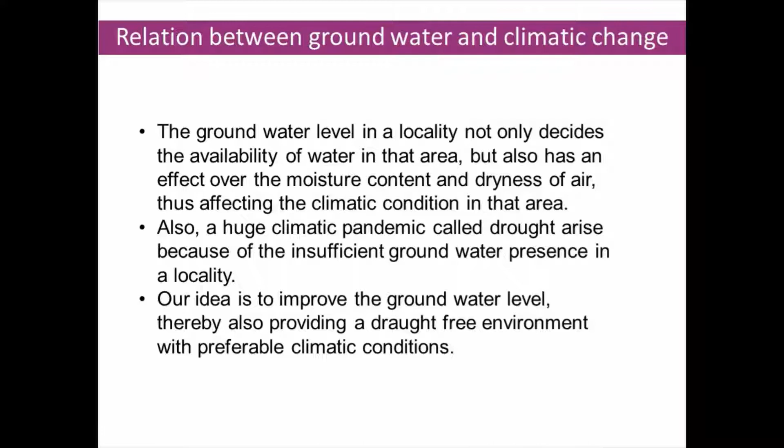This idea is to increase the groundwater level by condensing the atmospheric air to its dew point temperature and letting it seep into the ground through a pipe having a uniform arrangement of pores. Also, the power input to the compressor that is going to be operated in the water condensing cycle, that is the cycle through which air is going to be condensed to water,

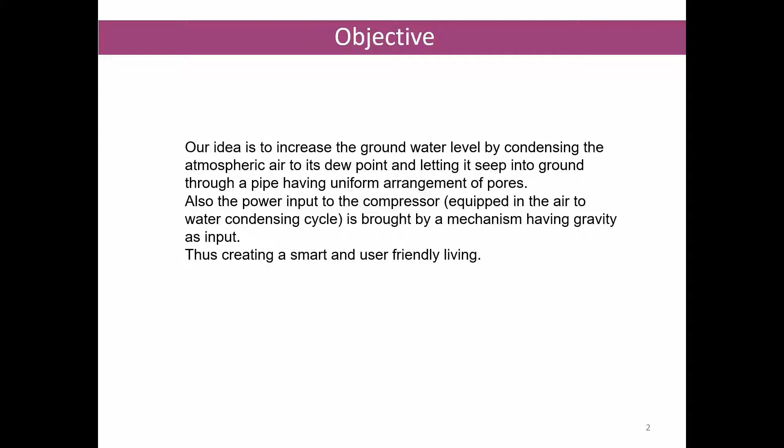could be given by a gravity mechanism. This could reduce the maintenance cost of the overall equipment, thus creating a smart and user-friendly living.

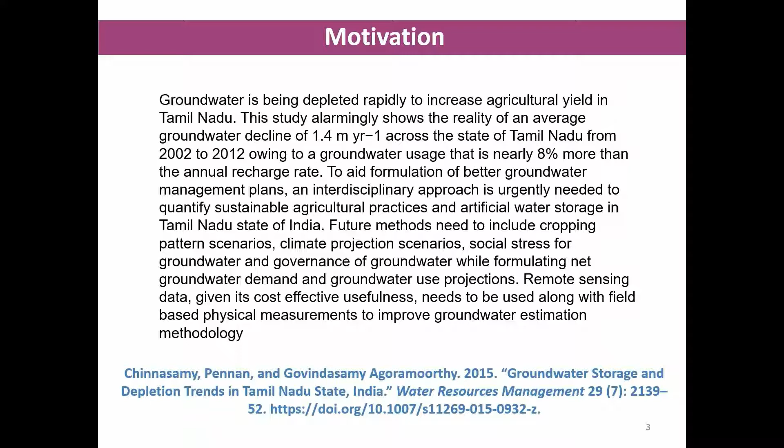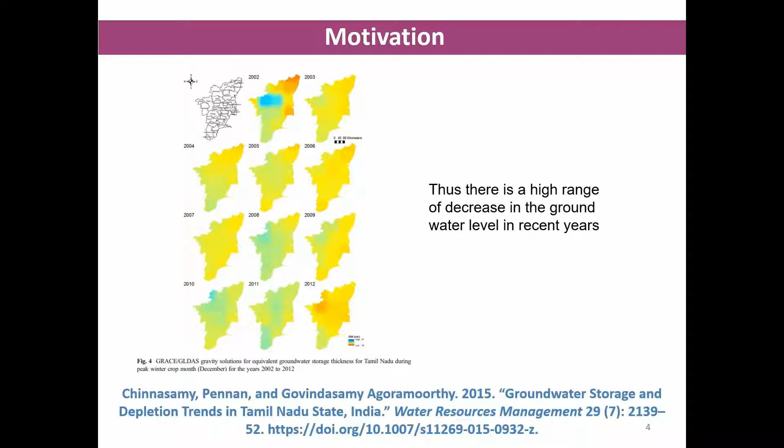Our main motivation for doing this came from a research paper entitled Groundwater Storage and Depletion Trends in Tamil Nadu State, India, which studied groundwater depletion from 2002 to 2012. The researchers Chinnasamy Pennan and Govindasamy saw a tremendous decrease in the groundwater level from 2002 to 2012, and this further increased in the next 8 years, that is till 2020.

So our main problem is that there is a high demand for water on one side, but on the other side a high amount of water is getting depleted, especially groundwater. Also, there are many difficulties in accessing groundwater, as many costly equipments are needed to access it.

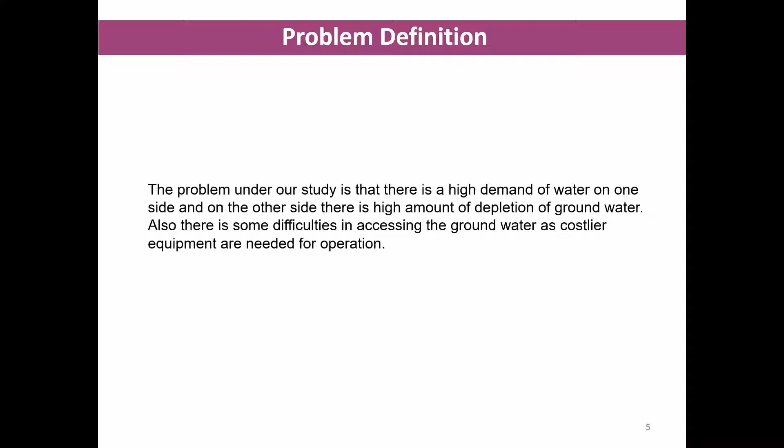The solution that we are proposing comprises 4 different mechanisms. The first one is the gravity mechanism, with which we are going to produce the power that has to be supplied. The second mechanism is the condensing mechanism. Through this mechanism, we are going to condense the atmospheric air to water.

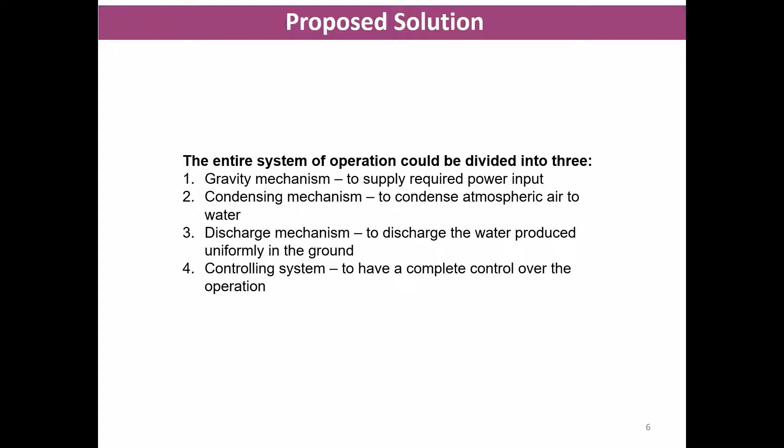Discharge mechanism. The discharge mechanism is the mechanism through which the condensed water is going to be uniformly distributed underground. Next is the controlling system. This part makes the entire project a smart one, giving us complete control over the operation.

Let us move on to the first mechanism, the gravity mechanism. This entire cuboid is going to be the gravity mechanism, which takes in gravity as the input and supplies us with the required power. This gravity mechanism needs several components, which are discussed as follows.

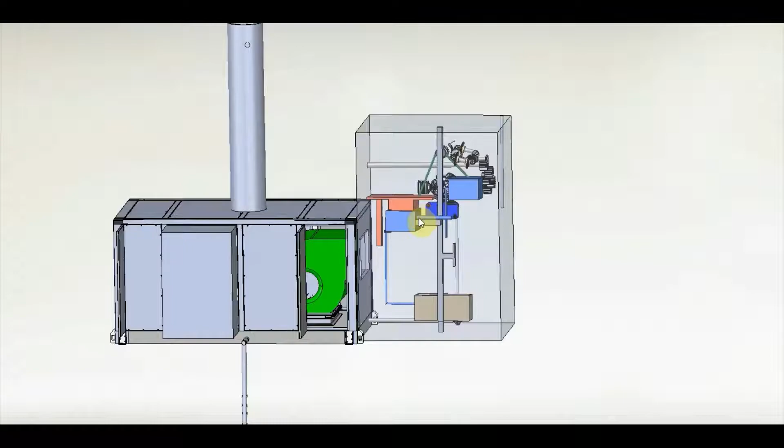The gravity mechanism consists of the following components: a central fixing member, a fixed chamber, a counterload chamber, a storage chamber, a load and a pulley. To the pulley, the load and the counterload chamber are attached on both sides. At first,

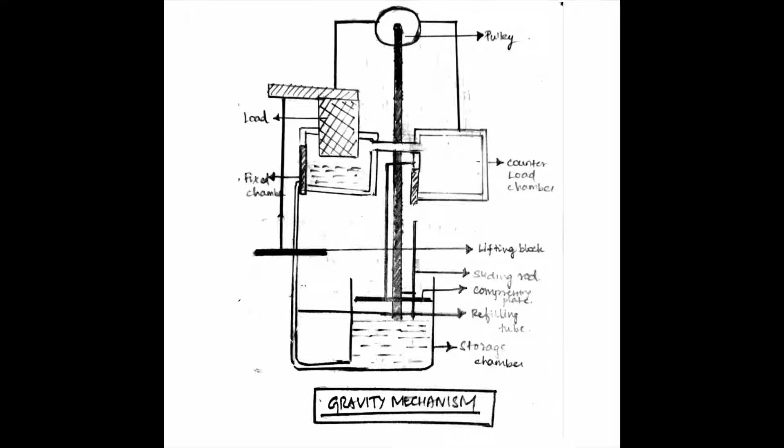the load, due to its weight and the pull of gravity, comes down and goes into the fixed chamber. As it gets deep into the fixed chamber, the liquid in the fixed chamber is transferred to the counterload chamber through a pipe which connects the fixed chamber and the counterload chamber.

Now, as the counterload chamber gets heavy because of the fluid being filled into it, it comes down and the load goes up. As the counterload chamber comes down, a rod pushes open a side of the counterload chamber, which makes the water stored in the counterload chamber drop down to a storage chamber.

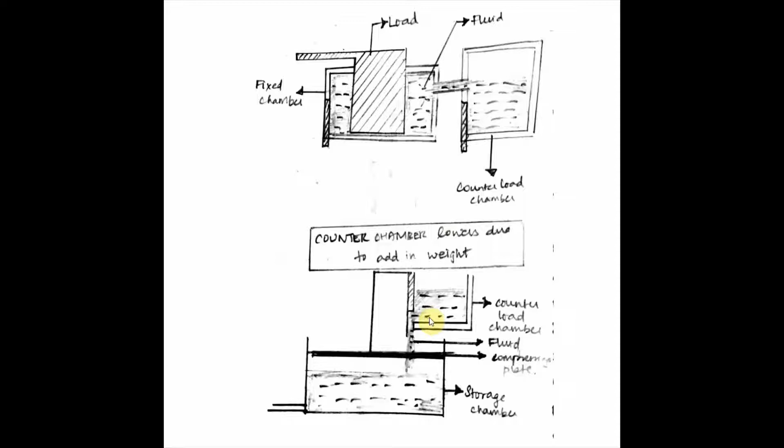This in turn will cause the load on the other side to come up, and this storage chamber stores water which gets pressurized to the fixed chamber by a compressing rod operated as the counterload chamber comes down. To say it in sequence, the counterload chamber comes down, also pushing the water in the storage chamber. Thus, the water gets pressurized and goes to the fixed chamber.

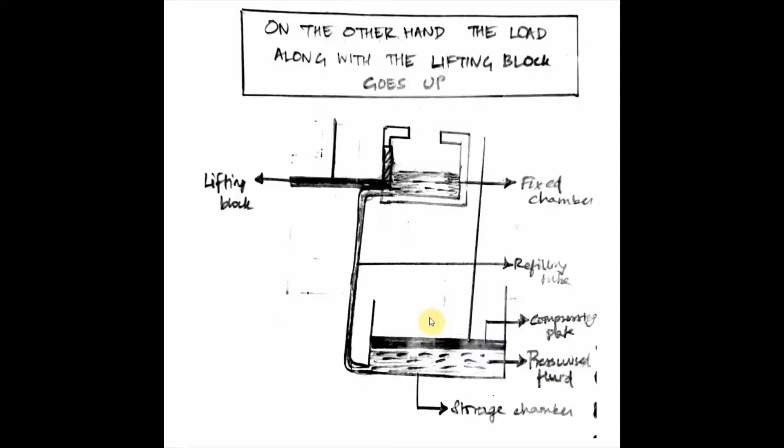The load again comes down and this cycle is repeated. Thus, we have a bidirectional rotation in the pulley which is going to get transferred to unidirectional with a geared setup. This mechanical rotary motion is going to get converted to electrical power with the help of an alternator. This electrical power is then stored in a battery that supplies the required power to the compressor in the condensing

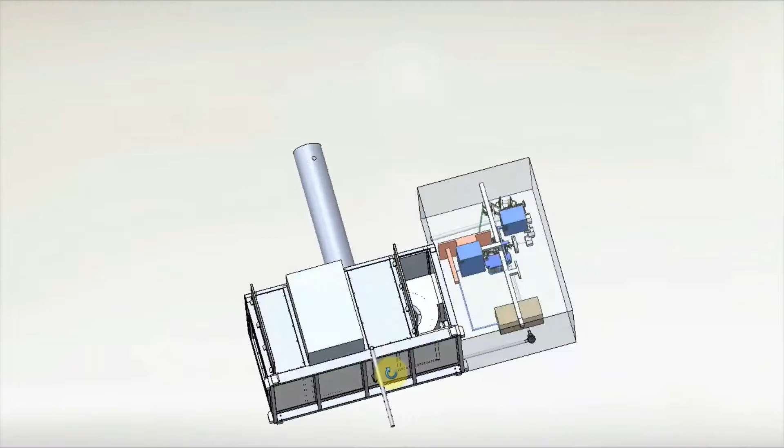unit. This condensing unit drives in the atmospheric air with the help of a propeller that we see here through this tube. And now the input air is going to get stored in a unit which has refrigerant flow as per the normal refrigerating cycle. This refrigerant flow condenses the air input to its liquid form, that is water.

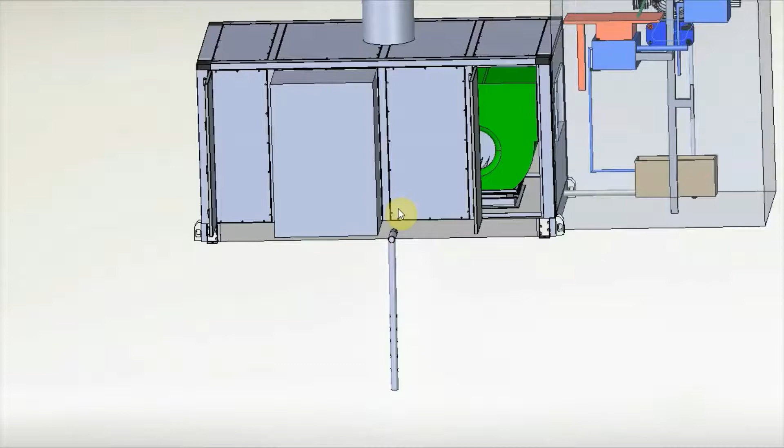This water is then stored at the bottom unit, and as we operate through an app, the water will be supplied to the ground through this rod which is closed on both the sides but has several openings in it which we could see here as small pores. As the water gets filled into it, it gets pressurized and the water sprinkles out through these pores. This entire tube is fixed underground.

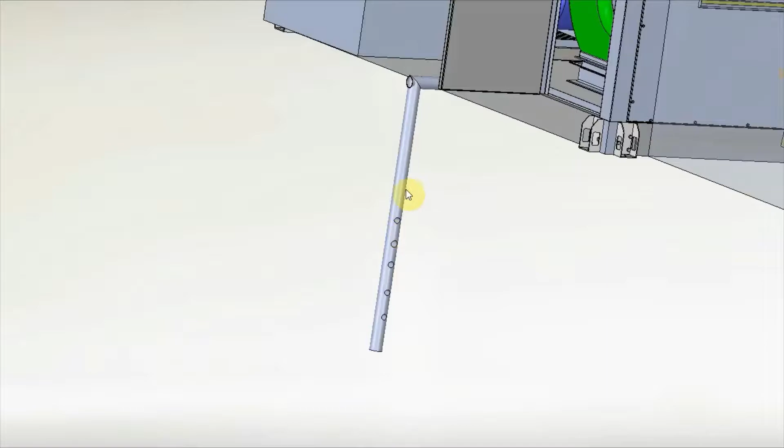Similarly, if it goes beyond a certain limit, for example, if it goes less than 25 liters, then too a beep will be sent to a mobile or a notification will also be sent. On the other hand, excess water will be supplied to the machine part. The other one that we could access through this app is the groundwater limit.

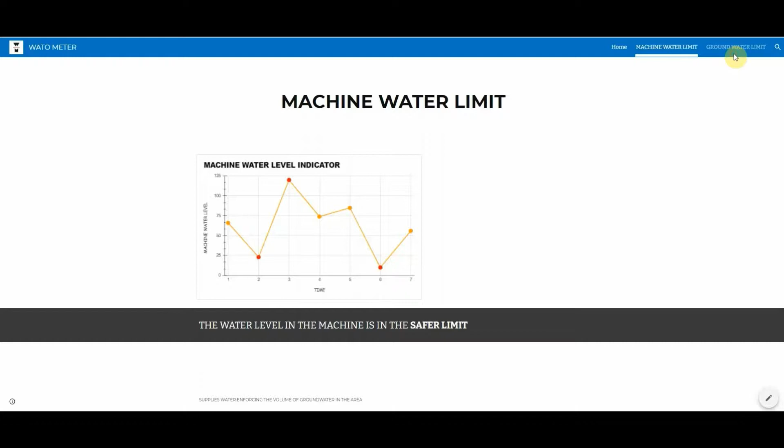Groundwater limit is nothing but the actual measurement of how many liters of water or what is the moisture content in the ground. Now, according to this moisture content only, the entire machine is going to operate. We make this happen with the help of moisture sensors fixed in certain locations where we have to measure the groundwater. If the groundwater goes lesser than a limit, then it gets notified with the help of a beep or a notification sent to the application.

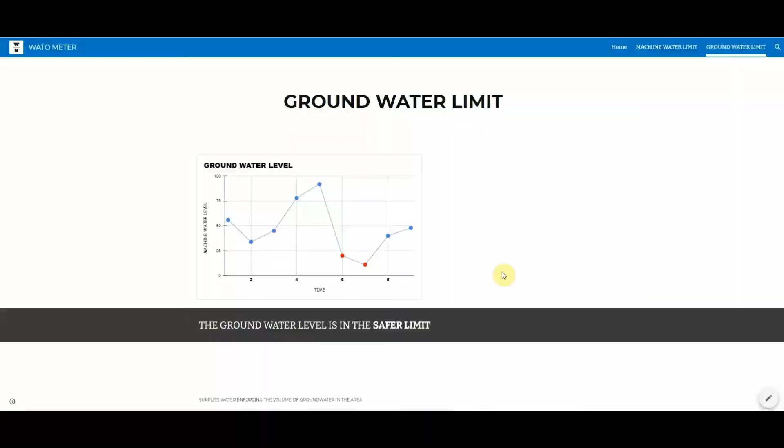To put it short, the solution consists of 4 different mechanisms. The first one is the gravity mechanism. Here gravity is taken as input which drives a pulley with the help of a counter load. Now the bidirectional rotary motion is going to get converted to a unidirectional motion with the help of a gear setup, and this unidirectional motion is converted to electric power with the help of an alternator and is stored in a battery. Next is the condensing mechanism.

Here the condensing mechanism operates as per the normal refrigeration cycle. Here air is taken from the atmosphere with the help of a propeller and is sent to the container which is maintained cool with the help of refrigerants like ethane. The next one is the discharge mechanism. The water produced by the condensation is passed to a tube underground which is completely closed. This tube has few uniform pores, and as the water seeps in, the pressure in the tube increases, and as a result of which water will be sprinkled out through the pores uniformly.

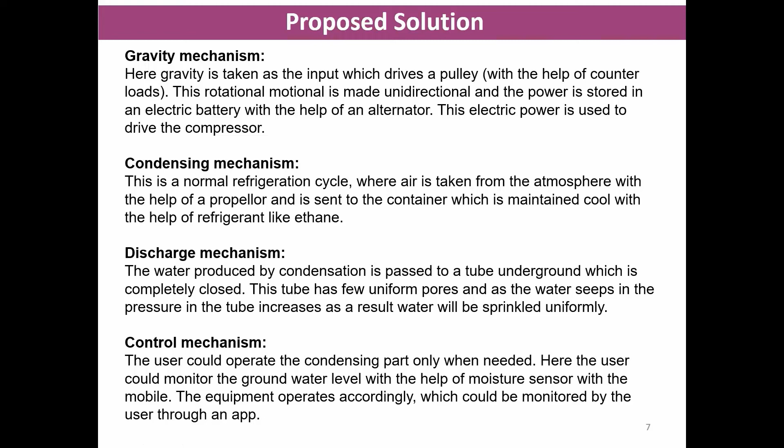Next one is the control mechanism. That is the mechanism that turns the entire thing to a smarter way. Here the user could operate the condensing part only when needed. Here the user could monitor the groundwater level with the help of moisture sensor with the mobile. The equipment operates accordingly, which could be monitored again by the user through the application.